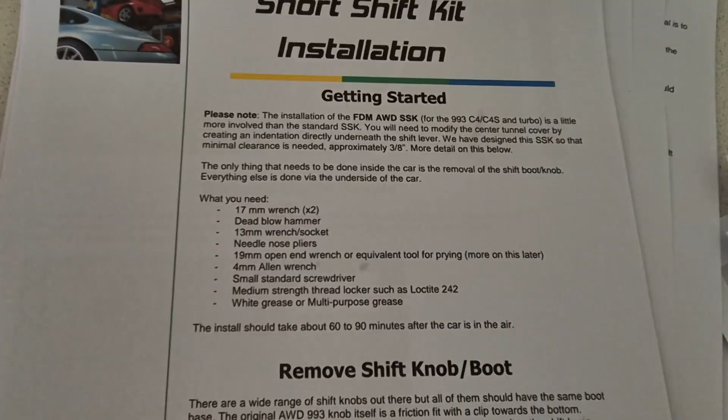There's a list of things I need to do. I need a 17mm wrench - hoping that's a socket wrench of some sort, because I don't have two of those, but I can buy some if needed. Dead blow hammer - not sure if this needs modifying now, I think it might have changed. We'll find out, but I've got a mallet somewhere, should be right.

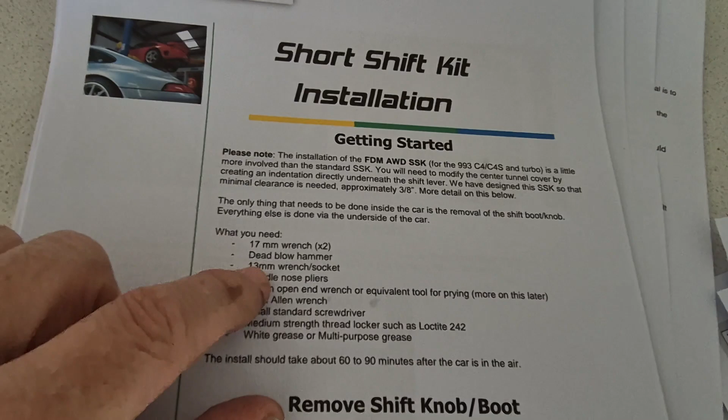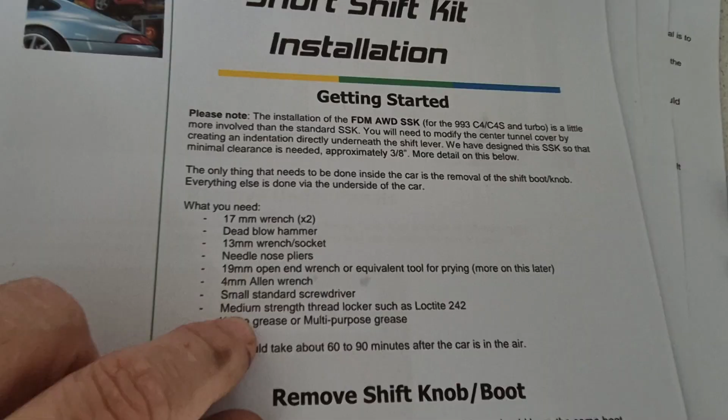13mm wrench socket, yeah got that. Needle nose pliers, got those. 19mm open end wrench, got one of them somewhere. Small standard screwdriver, definitely got that. Medium strength thread lock - I can only get 243, which apparently is the same thing but better with dirt and grease, so that should be okay. And white grease, I've got that.

Install should take about 60 to 90 minutes after the car is in the air. I'm tipping it's going to take me about 3 hours, just because I'm going to be slow.

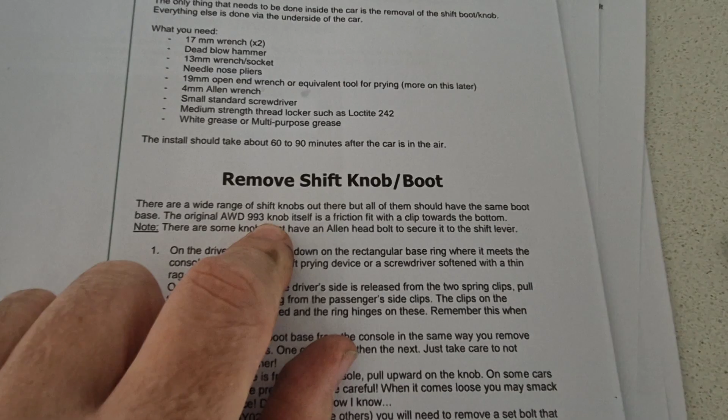So we're just going to rip through, following these instructions that you can download. I'm just going to make a video, so I'm not going to go through these step by step.

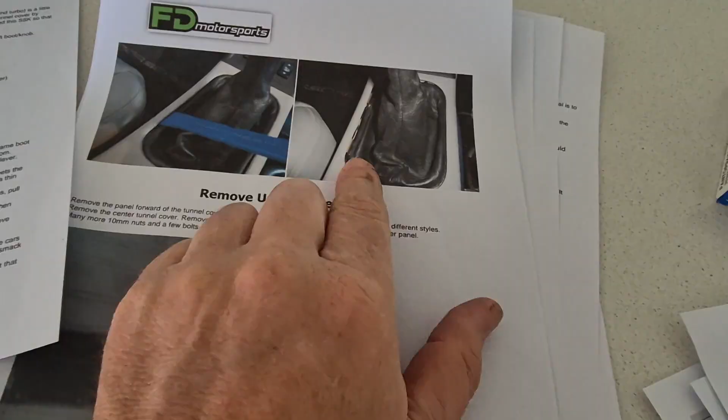Like removing the shift knob thing here - apparently you push down and just force it out. I've taken my console thing off before and found it quite difficult to get back in, so I might just take this center console bit out again. It's not a big job, and pry that off that way, but I'm not sure. Anyway, I'm just going to take a video of it and see how we go. Hopefully the car doesn't crush me.

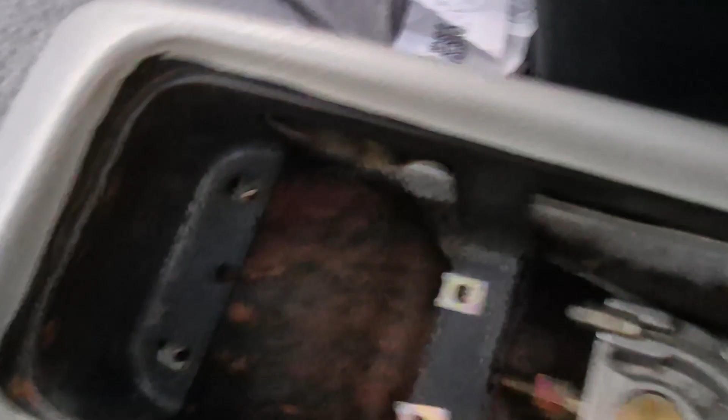Okay, so I've taken out my center console, undone it. There's a couple of screws back there - two screws for the cup holder, one screw under the handlebar here to remove this cuppy thing, and a couple more here, plus one under there for the black bit in the trim in the middle, and then a couple down here in the padding.

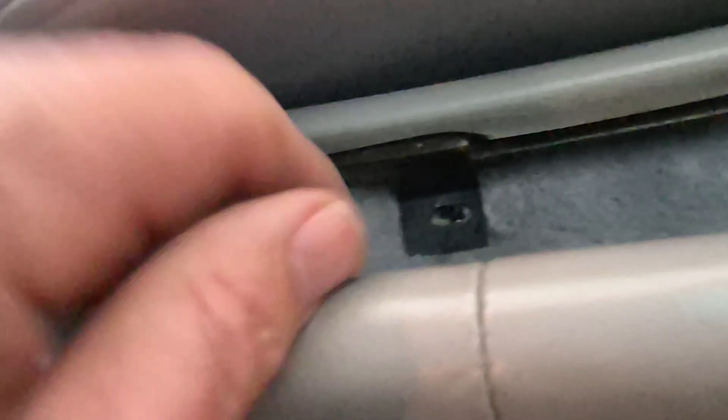Also noticed this cord coming out of the handle is really quite squished there. I don't have any issues with it, but maybe when putting it back, I might put something over the top of that just to stop it getting squished so much. Looks like that part of this holder squishes it on, so maybe I'll just scrape that back a bit so I don't cut the wire. Just noticed that.

And then in here I had to take this bit out, pulls out, and there's two screws in there, and that has loosened up my whole thing, so hopefully I can get this up high enough past the seatbelt buckles to get under here. I'll see if I can show you.

Alright, so I've got that sort of out, and I can get access under here to the clips.

Okay, so this clip - you can see one clip, and there are two clips you've got to pry off. I think you do that by pushing down on the top of it, technically what they say to do is push down on this bit here, this rim here, and it just pries out. But I think getting it out might be okay - putting it back in might be a different story. Don't know. Anyway, I'm just going in there and pulling it out myself.

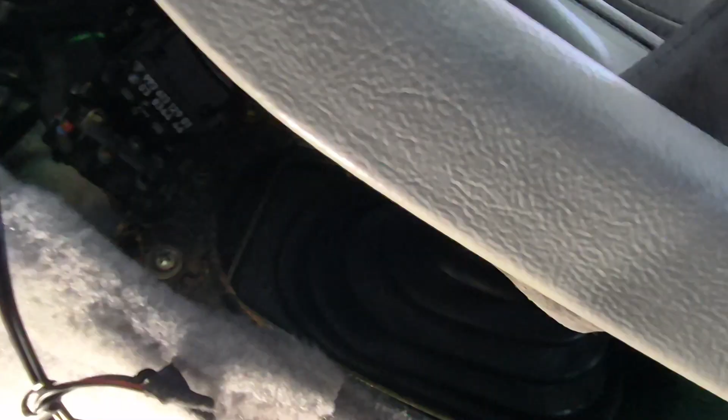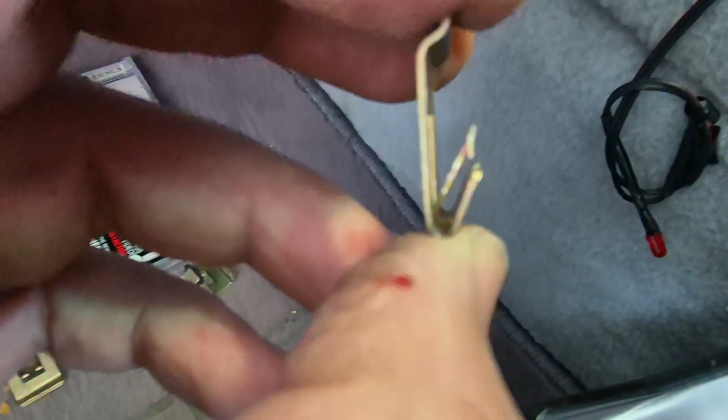So I now remember why I get it in the console and do it, because this is the clip. And if you look at this little jagged bit, hang on, it's a little jagged toothy bit. If you're pushing that straight down, it's sort of wedged over a bit of plastic, so I don't know how you can just push down on it and push it out. It really sort of clips in, unless this whole bit's meant to stay in and just the top bit comes out. I don't know. But anyway, I've taken them both out.

I've got a screwdriver in between these - sorry, the focus is so bad. I've got a screwdriver in between the pointy sharp bit there and the flat little bit next to it, and just pried it open, then pulled it down, and it sort of came out. It's a tricky job though, bit of swearing involved, but okay, yeah, popped down, so all loose and nothing connected.

I think it's meant to be sort of in - I think you're meant to push down here and pry that off, but because it sits in a groove on this side, the holder sits in a groove on that side and is clipped in on this side, for me anyway. Right hand drive, don't know if it's different, it shouldn't be different to any other car, but anyway, that's it. The bit's off. There goes my first 60 minutes.

Okay, so let's start with a little gentle prying.

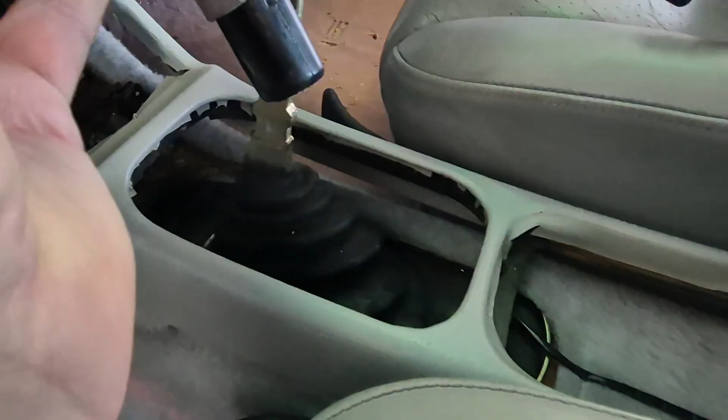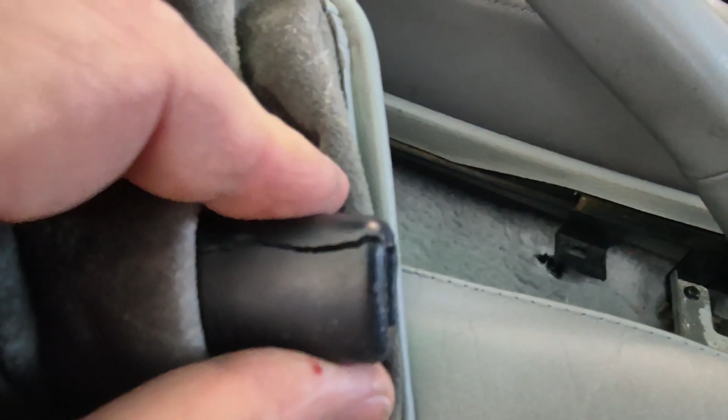Yeah, that was on there. A little bit of gentle prying, pulling, just gentle pressure or whatever. That came off. I've had this off before, and this is gutsed a bit at the front here. I've never repaired it because I couldn't see how it would then fit back on without being gutsed. So someone's had this off before me and sort of cracked the front of it, but it goes back on fine. Maybe the leather holds it together, and it doesn't seem to affect it too much, but technically that's not good. Anyway.

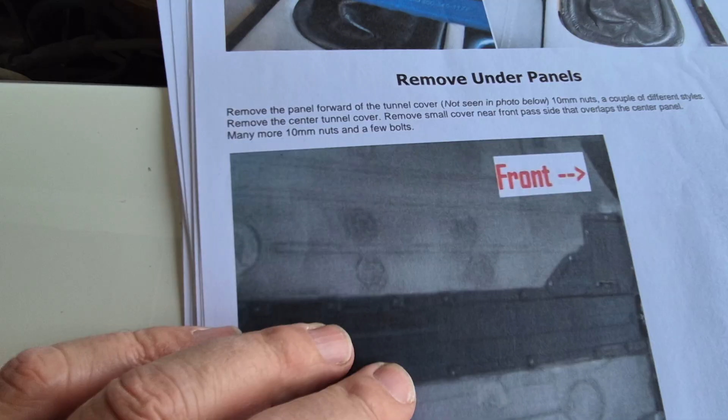Okay, stage 2, remove the under panel. So that's what I'm going to do. Just took off my front panel, and because my back floor panels are wedged in by my lift, there was an extra 8 or 10 nuts, but it was easy with a drill. Just whipped off the little side panel that's just up here.

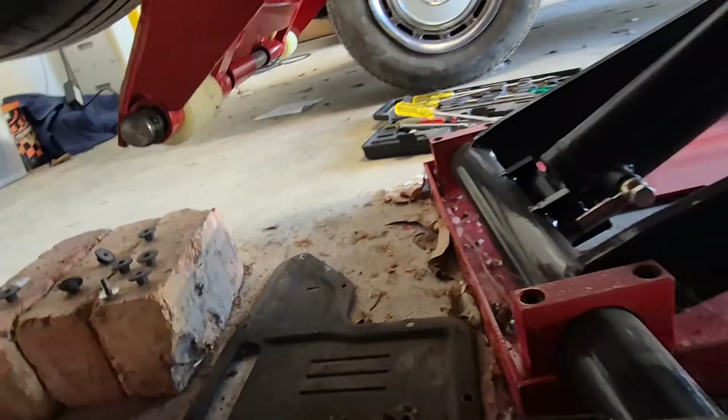Covers that, sorry, that's very close up. Took off my 10 things, pulled the thing out. It's all down there on the ground. You can see the front panel there. Center panel is just there next to it, and the little panel's over there holding some nuts and stuff on it. So now I've got access to the boot and all this stuff under here.

So let's go. Now what I've got to do is pull the rubber boot down, use a pickle fork, 19mm end, to separate the ball cup joint - slip the wrench in between the cup and the end of the forward fixed rod and the shift lever, between the red lines and below. Continuous pressure, prying down, we'll pop it off. Let's see - heard that story before.

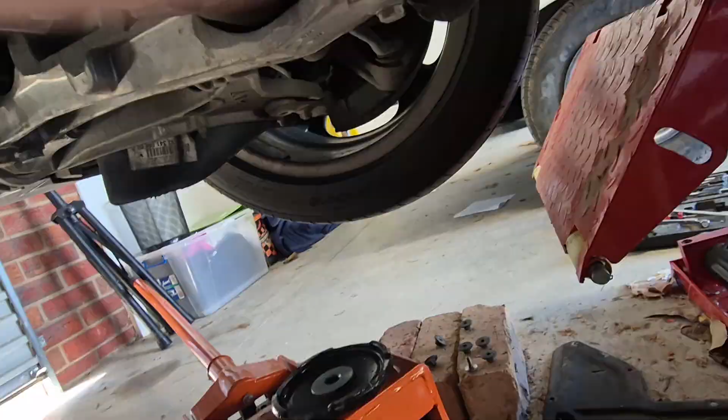I'd laugh if I went in here and already had a bloody short shift kit on it. That'd be funny. Well, that is... focusing on it, that is off. But I'd rewrite the instructions saying it just popped off - I'll tell you, it didn't just pop off. Took a little bit of love.

Okay, I've got to do the same thing at this end. Or I can just pull it down and it comes off apparently, but after the last effort I'm doubting that's going to happen. Let's see.

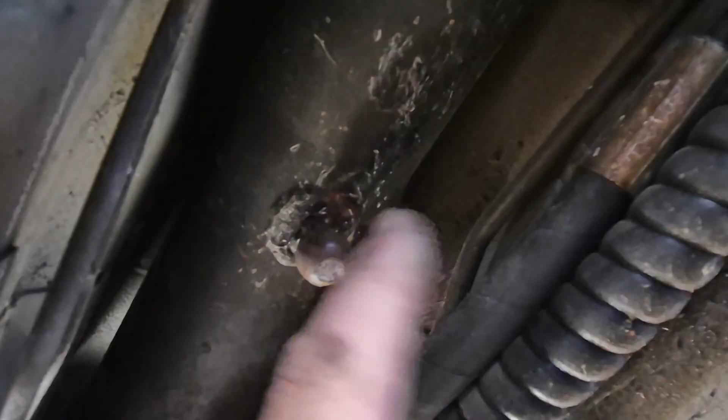That one's out as well, the front one. It took me a little while, but I think I was just being careful because I've never done it before. I didn't want to snap anything off, but in the end I just pulled it down and it pried off almost on its own. I didn't want to bend that, but there's no way you're bending that, I don't think. Anyway, it's off. Booty's off. Let's go to the next stage.

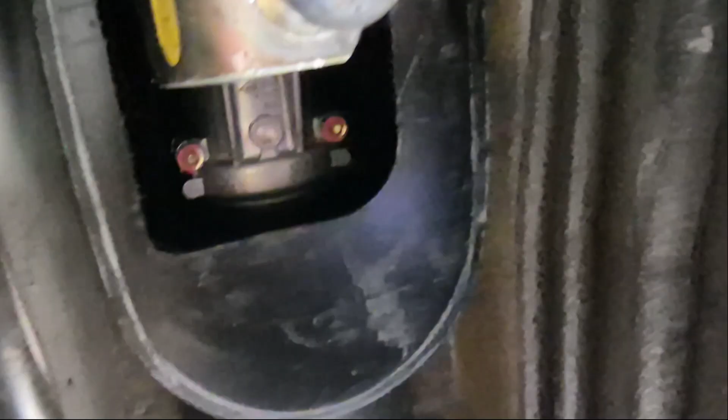Okay, up underneath there are 4 red Allen things, you can see them there, and there's a little spring clip somewhere - I think just there. I've got to take off just at the end of that rod. Doesn't matter which order you do it in apparently, so I'm going to do the bolts first, then the little E-clip. Hang on, the E-clip's just there, I might just do that first. Take that off - whatever, E-clip, I don't know what they're called. Clip on the end of that.

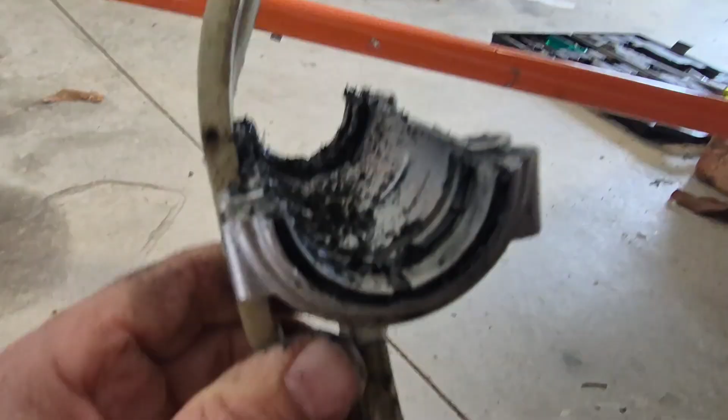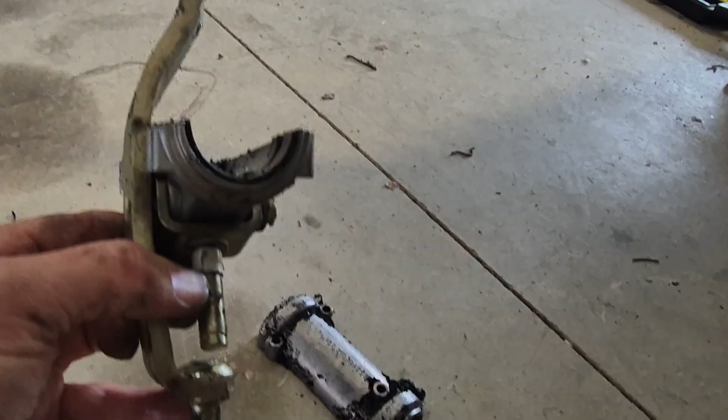Okay, so I've got the 2 halves out. The instructions - I can't remember exactly what they say - but it's like loosen the four Allen bolts, let the bottom half drop down, rotate the top half and let it all drop out, which basically makes sense at the time when you're doing it. This bit's sort of half stuck, and because you've never done it before, the top half's up there, but what's spinning around, don't really know. But in the end, you literally - I've only got 2 hands, obviously - so hang on, let me just do a couple of things here.

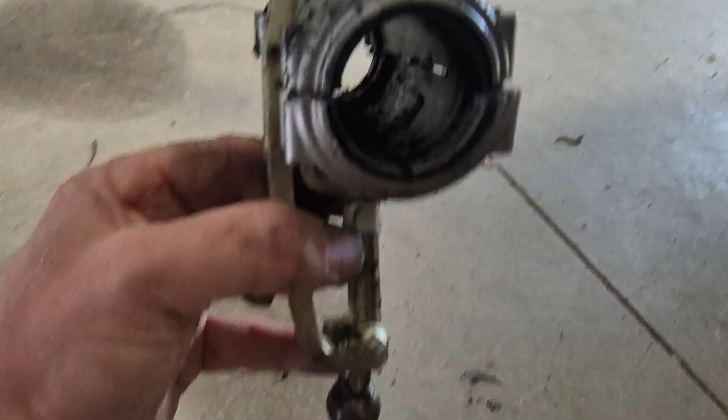Yeah, if it's like that, it stops you pulling the bottom half straight out because that bend in the shifter hits the top casing. So you're basically rotating the casing like that or similar, and then you can pull the bottom shaft down and out, and then it all just sort of comes out. So anyway, it's out. That one's a little bit not straightforward, but once you've done it once, it'll be easy as.

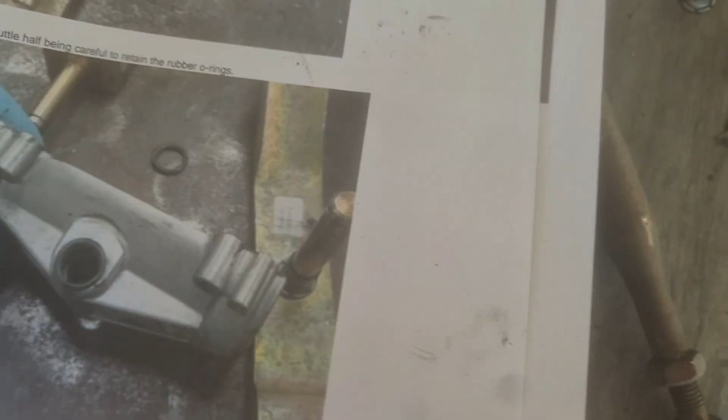Okay, so I took off the spring washer things, whatever that clip is, and pulled it apart, gave it a clean. My O-rings stayed inside the unit, so I've left them there, haven't touched them. Gave it a bit of a wipe out because it had a lot of crap in there, probably from underneath the shifter boot when jiggling it trying to get it all out. Not sure I was supposed to wipe it out, but I'll add more grease to it as instructed.

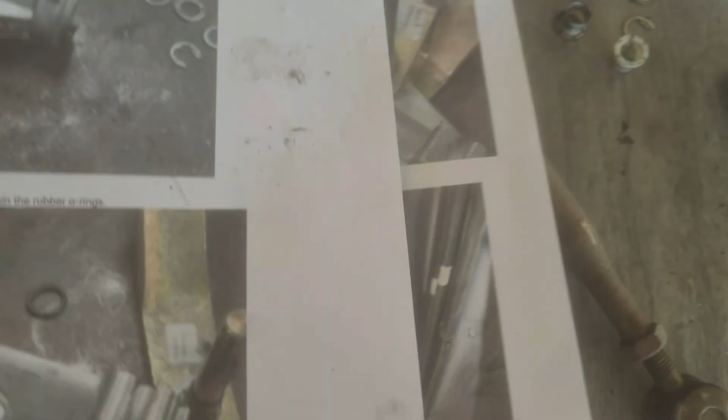So here are the bits I've taken apart. Sorry, it's a bit all over the shop, so I've given this a clean up. There's still something gritty in it, not sure what, so I don't know whether to give that a wash or not. I'm very much don't touch what's not broken. I'm going to make sure these guides are clean and we'll re-grease them up.

These bits came out of one of these, out of this part anyway, came out of like here. I thought, oh, they're broken, this one's cracked, but it should be right. The other one I took out was exactly the same, so I'm assuming they're meant to be sort of half cracked. Got my thingos.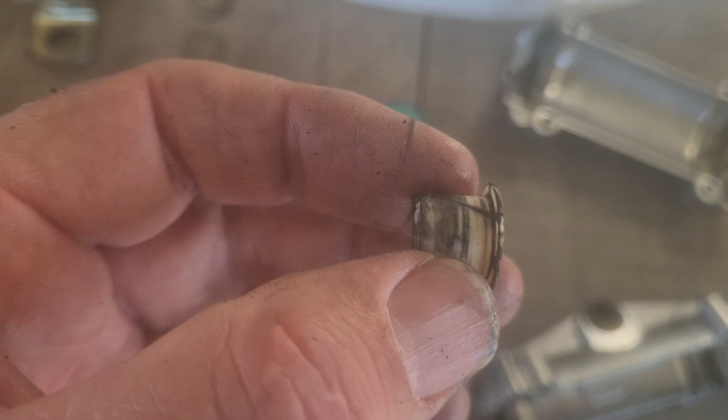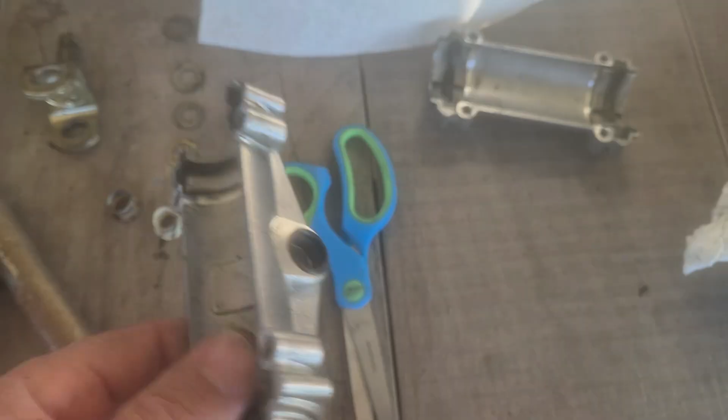So really, following the instructions, I basically just slide in the new shifter bit, which is in here, and reattach all the clips, reattach the part, and oh, that one's got a crack, the split in it as well. Interesting. I'll give that a clean up too, and then just put it all back together.

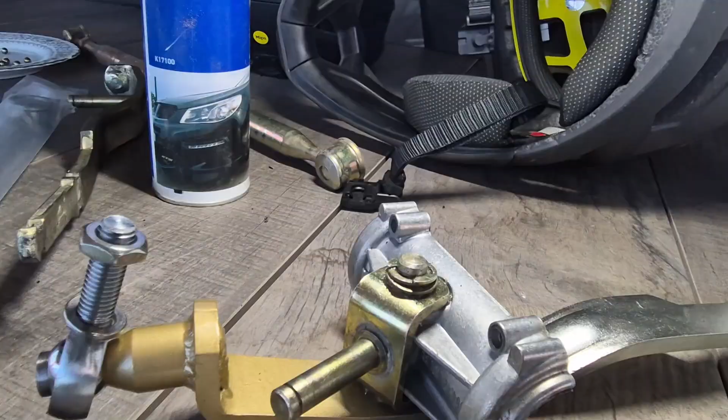Okay, so it's back together. The reason I'm not going into detail about taking it apart is it's pretty straightforward. Just make sure that clips in properly.

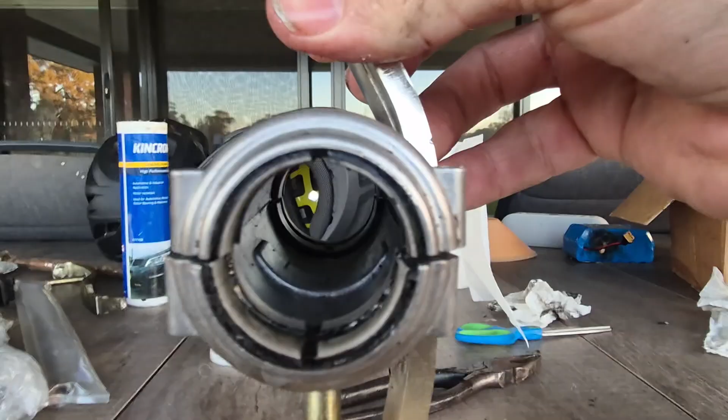That's it together. So you're going to have to just look at this, see this with my thumb, and I can't remember how to zoom out of that. My thumb is well over this casing just here, so you can't have the casing sitting like that because you can't feed it up. You've got to basically have the casing off.

I'm assuming sort of to the side, so you put that in first and have it sort of sitting to the side. You would then slide this lever up into position, and then when it's into position - I can't hold the phone at the same time, sorry - you would then roll it back over and then do it up.

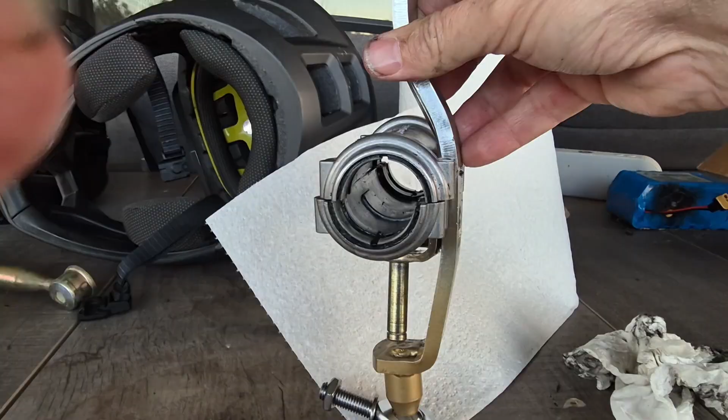Which is what the instructions actually say, but that's the opposite of taking it out. That could be a little bit clearer, but anyway, I worked it out. Anyone else can work it out too.

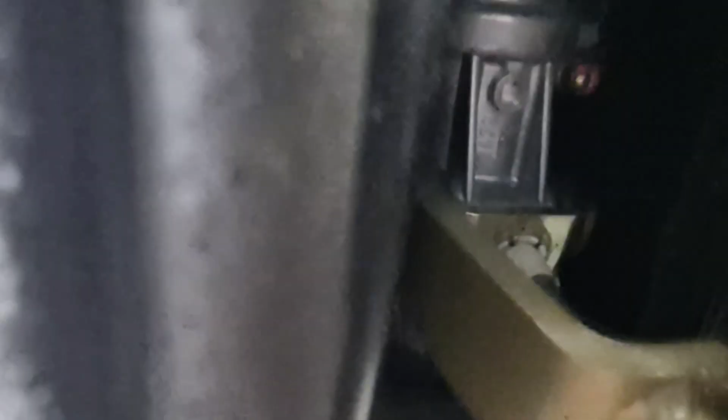Okay, so they're back in, but I'd almost rather kick myself in the balls and do that again. That was just annoying, but it was true. Once you got one of them in, though, the rest went really easy.

So I haven't put Loctite on them yet. I'm going to take them out one at a time, then put the Loctite on them and put them back in, but that's where we're at so far. Got that little white plastic washer greased up as well, if you can see that just there, back in there. And we'll get onto the gold rod next and see what happens.

Okay, I'm just wondering if I can do this without taking this whole back plate off. Sorry, bad picture, I'm zoomed in, but yeah, there's the covering, plastic covering.

So I was wondering if I can get to this boot. That's the nut I got to take off, so I'm going to do that. Oh, there it is there, and slide that out.

Here, which I'll come to take off, and I've got access to this nut, so I don't think I have to take it off. Though I might want to take it off because I want to have a look at the transmission mount in there later and see if that's buggered up.

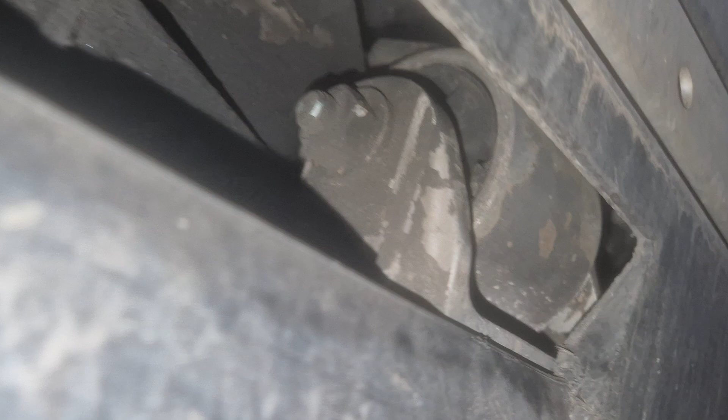Looks okay, but sorry, very out of focus. It looks okay, but I just don't know. The problem is it's all wedged under my lifter to get all the screws out, so I can't do it in one lift. Anyway, I'm going to take this off and get this old rod out.

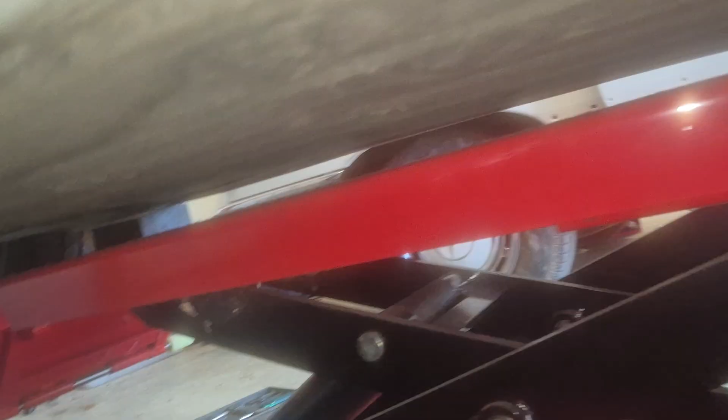So I undo that screw and drag it back towards the front of the car. Okay, that's come out, it's a nut and a washer from the little hole there. Let's see if this thing just shifts out.

So that's not like gears changed. I think they just sort of changed gear. I don't think it actually... I'm going to need two hands to give this a pull, so I'm just going to do that.

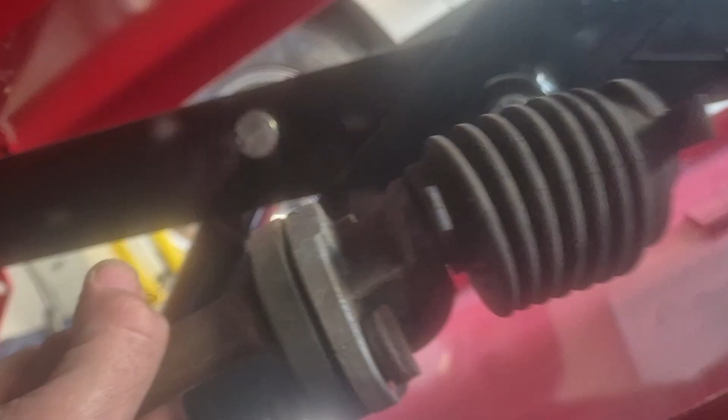Okay, that has come out. That took a fair pull to drag out. So yeah, double hands, good firm pressure, and it yanked out.

So it looks a bit loose. Let's have a look how poor it is. Okay, that's out. Don't forget, don't lose this little grommet in there, you're going to need that little plastic bit.

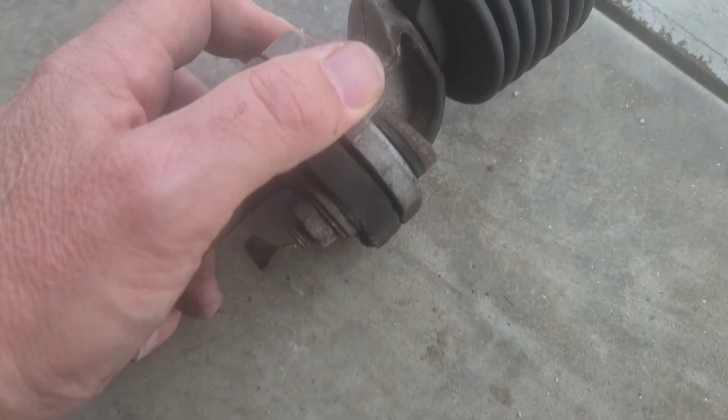And this, you can really see - I don't know if that's meant to be tight or not, but I presume with a bit of shifting it was a bit, I don't know if it's meant to do that, but I don't think it is. So that's a fair bit of wobble in that.

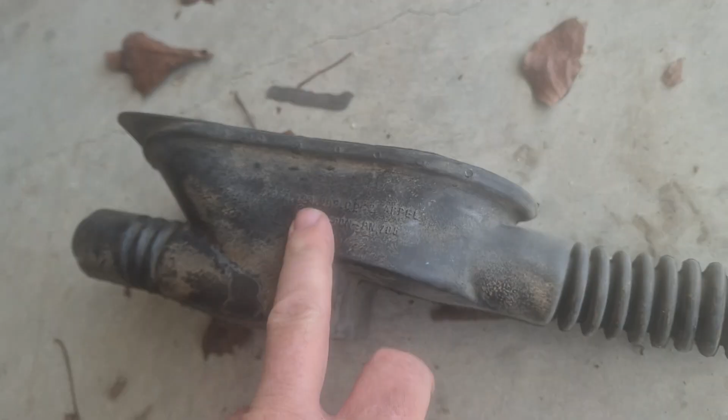So hopefully it'll tighten up the shifting a little bit. Who knows? Anyway, I'll give that a clean up. Let's get this rubber boot off it, clean up while I'm at it, and we'll get the new one back in.

Okay, I have cleaned up the rubber boot and put it on the rod. I didn't actually check which way this came on or off when I did it, which I should have, because it's not actually symmetrical. But going in, I've deduced that the bigger hole is at the gearbox end and the smaller hole is at the shifter end.

And it's sitting the wrong way around. If it sits the right way up, so if I turn it the way up it's going to go into the car, which is that way, which I've greased up the top bit. Oh, you can't see it. Greased up the top bit, I've got a white bit on the bottom. The other white washer is already on the car.

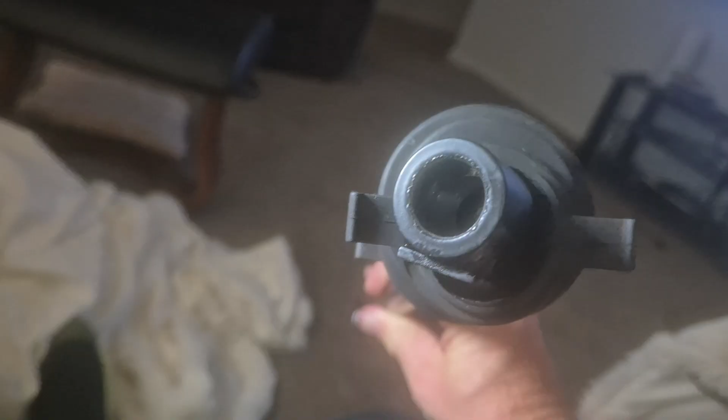It's the higher point - the rubber boot isn't down the middle, so the higher edge I'm putting to the top of the car and the thinner edge at the bottom. So that's how I'm going to try to put it in anyway.

Okay, I've got the boot back in there and the nut on. I haven't actually got Loctite on it yet. I'm going to get it all put back together first before I do that. So now it's got the rod to put in at this end, just there, so I'll lift it up and chuck it in.

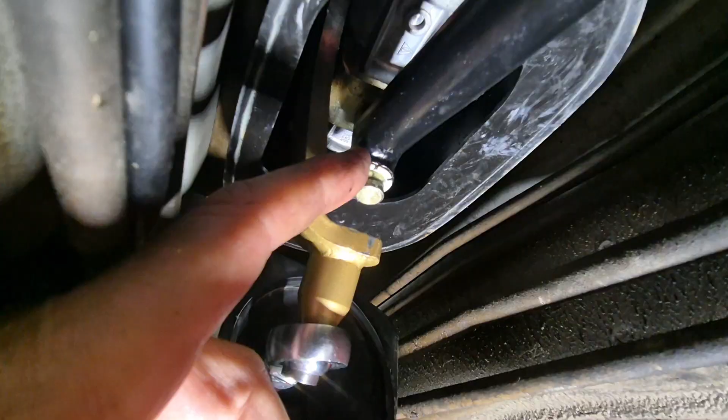I took the nut off at the other end again, the fixing nut at the gearbox end, because I found the angle too hard to get this in properly with the plastic clip. So I loosened it, or took it out, left the shaft on, the golden rod or whatever on the gearbox end.

Then I fitted this on because I had a bit of play, a bit of pressure, didn't hit it, just used a fair bit of pressure just to get the angle right, a bit of grease. And then I've rebolted it back at the other end. I'll put the washers and the clip back on here.

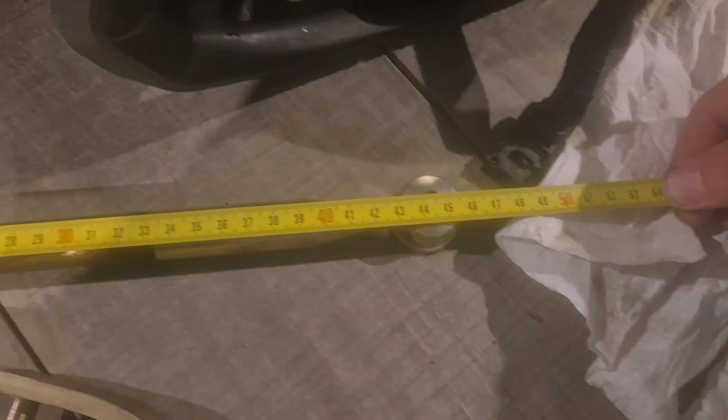Okay, measuring the original one from center point to center point, 44.5 centimeters. Okay, well, I've got my shaft here.

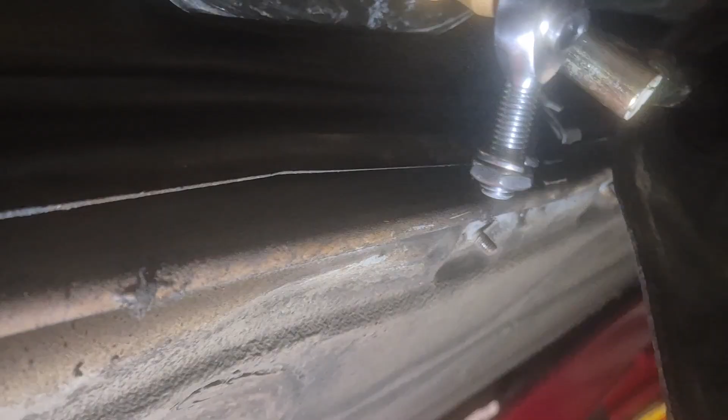I'm gonna connect this part onto that bit hanging down halfway, as it says in the manual. That gets you some room to adjust forward and back. Then I'll see where the front end lines up with this, and see how we go. I'll try.

So that's what it's looking like at the minute. I've sort of lined it up with the ball. I've gone up the top and it sort of sits in a good spot.

I'm not sure why they don't reverse thread one of these, then you could just twist this pipe and it would self-adjust and lock it with the nuts at the end. I guess a risk if the nuts come loose it could move, but I think they're threaded the same way. So if you spin this bolt, the long tube, this one would extend and that one would retract and vice versa, so it wouldn't really serve any purpose. But if it was reverse threaded one of them, you could spin it and both would increase and decrease, and you could just adjust it. So that would be a good idea.

But anyway, it seems to be in the right spot. So I'm going to now tape this onto the ball, and then go and see what the shifter feels like. If it feels okay in the right spot, then I'll leave it at that, because I don't really want to push this on and have to pry it off again, because that'll probably just wreck the bit in it. So yeah, let me just tape it up.

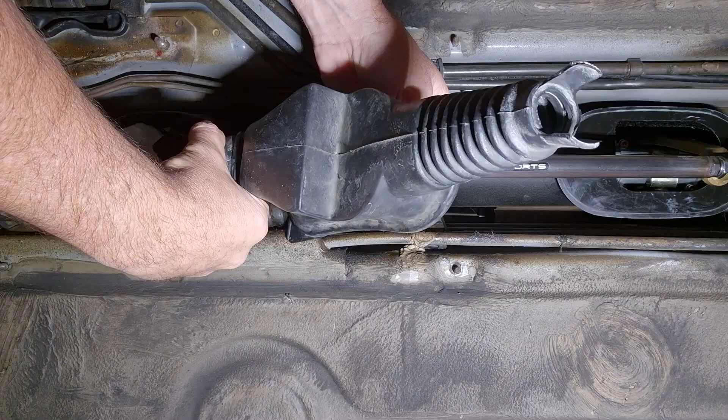Actually, because I've got that sort of marked at a spot, have I? Yeah, I should be able to.

I will then tape up that end. I'll have to remeasure it because I moved it to get this back on, but I'm going to go for 44.5 centimeters and see what it's like, and then see how it feels.

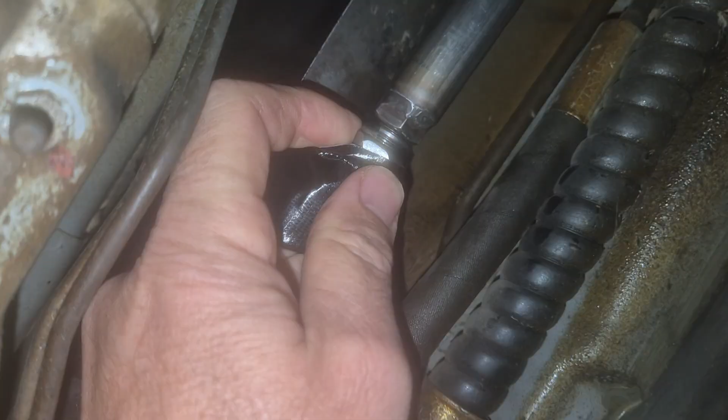Right, so I finally worked out where the 17mm wrenches are, and that's to hold these two nuts - well, the rod and the nut - to tighten that up, and the same just in there. I can't pull it back with this, just tighten both ends. Also, it's important that the plane - so if that is sitting like flat, like a cup or whatever - make sure this end is flat, and that is flat as well. So just make sure they're in the same plane, so one's not at like a 45-degree angle to the other. Just make sure that's flat and that's flat when you tighten them up.

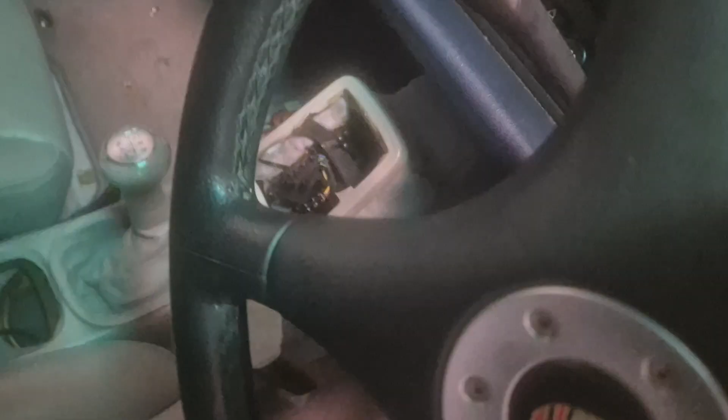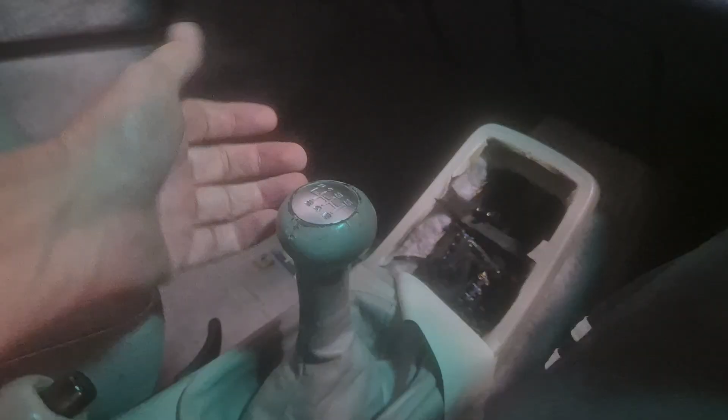Okay, so it's sort of taped into spot. Seems to look all right. I'm just gonna see what it feels like, because I think you sort of want to get this right the first time. Not sure if it's too vertical or not for me, but it seems okay. Don't know the angle on this side - if I get a look at it, I know it's about feel.

Okay, so I've got my movement going now, which is basically that. I'm thinking maybe sitting it a little bit more vertical - I'm not sure, I'm just trying to think, because that's quite short. That pulls down, I can't even remember what the other one was like now. So that feels pretty comfortable. I've measured it the same, but I have a feeling I might just want a tiny bit more forward, just for that throw down there. It seems okay, don't want that any more forward. That seems pretty fine actually.

Another thing, when I was testing, I still haven't tightened it all the way up, but the nut at the gearbox end - I just had it finger tight to test it, and it was quite wobbly, really quite wobbly. I was a bit worried, but then I thought, I went back and all I could see, the only thing that would make it wobble would be the nut down the other end, which it was. And now when it's in gear, it wobbles, but it's not wobbly - it's quite firm actually.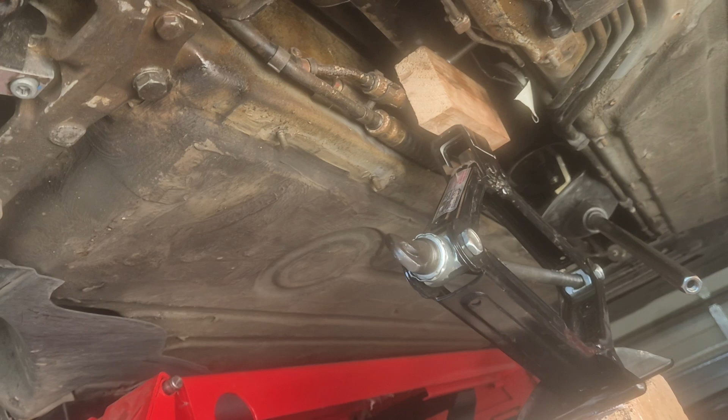It's good. So don't judge me for the setup, but that's what I did to get the cup on. I could not get it on. I was lifting the car up from the front. I hope I haven't rooted stuff - it just wasn't going on.

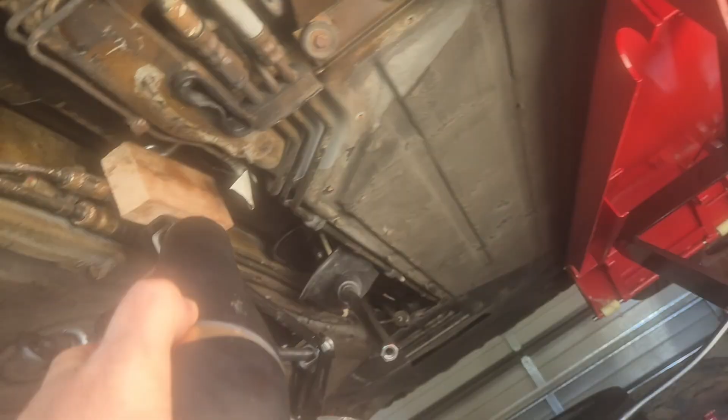It is about 10 degrees Celsius outside, or in here probably - could have been 14 or something. So in the end, I put it up like this, raised the car, took the weight off a little bit, and then a hairdryer, which is right here - banged that on it, just held it there. It was going to give up and I was going to take it down, and then it just slipped on. So can I suggest that and a bit of a hairdryer on it, and it went on sweet as.

So anyway, sorry about that - sorry I'm at a bit of an angle because I'm lying down. That's it, it's finally on there.

Now normally you'd have the rod connected, I'm assuming, but I had to take the rod off so I could get it absolutely flat, because I could not get it on otherwise - it's on a bit of an angle. I'm not sure, but I think there'd be enough thread either way.

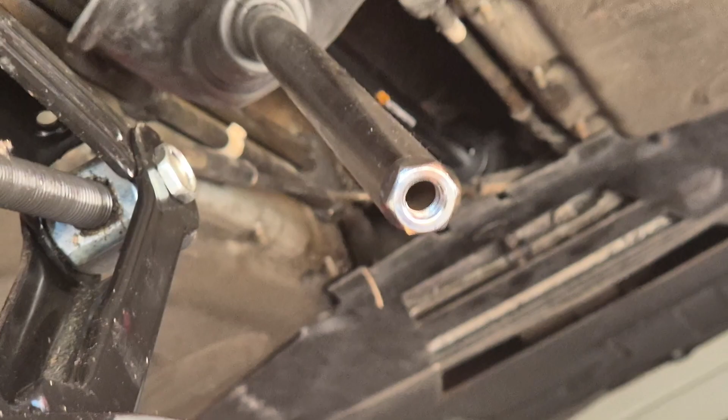Once again, I'll say it, if one of those threads - either there or down at the other end of it, all the way down that end - was reverse threaded, you could literally just change the length of the rod by twisting it. So anyway, let's see how we go. If I can get it screwed on all the way at one end, and then screw it all the way on at the other - I think this end's even longer, I don't know, whichever's longer. If there's one longer than the other, I'll screw it all the way on, and then off the other end, and try to get it the right length. Anyway, a bit of playing - I think I'll be able to get it the length I want, even though it's disconnected. So anyway, see how we go.

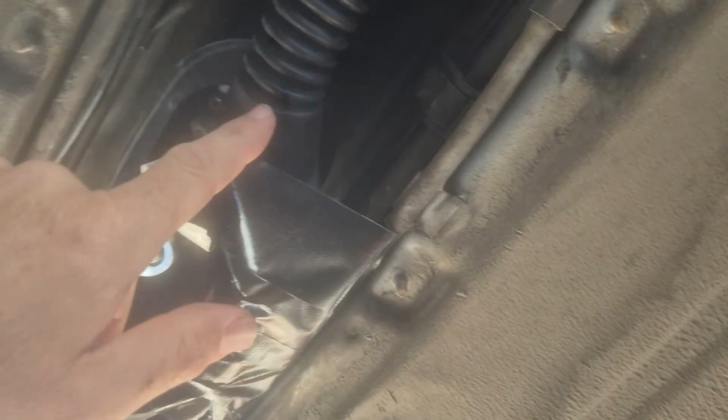I just taped the boot out of the way, so this can have access to scratching the metal a bit, just for me to test it.

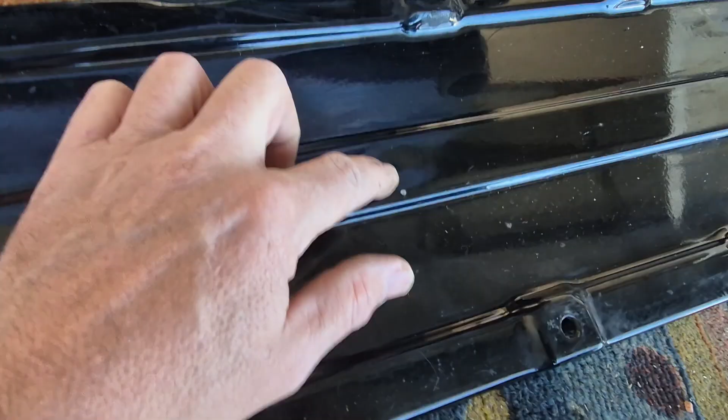Okay, so it's come up with a little scratch just there, right near the ridge, and you can't really see, but there's a scuff mark across the middle there. So there's already a very slight indentation, you can sort of see it there already. That was there before, so whether someone else gave it a little tap or whether it normally comes like that.

I'm just going to try to knock about 1 centimetre wide across here. I know this bend here reinforces it, so I'm trying not to bend it, I don't want to wreck it, but I'm just going to use the flat end of this - it's like a $10 bloody thing, I'll never use it anyway - just to get a bit more of a direct run across there. But anyway, see how we go. I hope I don't fuck this up.

Okay, so now you can tell I've sort of flattened it out a bit acrossways. I really wanted to get this bit right near the lip here down, because that's where it actually took some paint off. The rest just scuffed it slightly, but here it took a bit of paint off. So what I might do - I don't think I've warped the rest of it, so I'll give that a little respray with black paint and let it dry out, and then do the same thing again and see if I've still got scuff marks. I'll just tap a little bit more around here to get it a bit wider, but that's about it. We'll see how we go.

So I've repainted it up, so I'll get it back up there and see if it re-scratches once that dries.

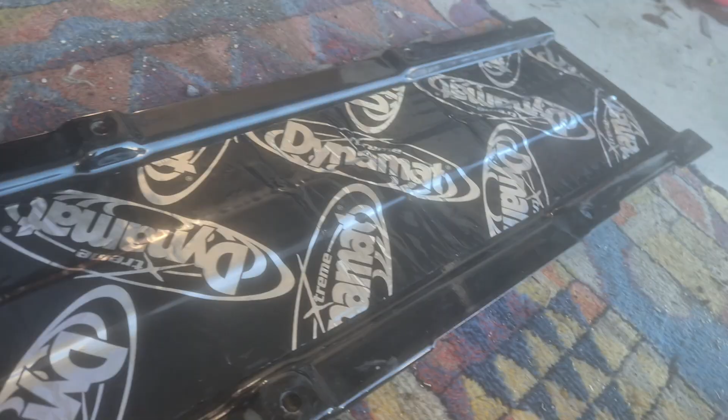Okay, picture's not great, but final test run. First of all, when I was driving it, I gave it a little test without this panel on at all. Obviously, a lot of road noise was coming up through the gear shift lever area inside the car. So really, there's only the rubber boot underneath that probably wasn't connected properly. Then there's a rubber boot on top, under your gear lever cover, under the original leather gear lever cover. There's a rubber boot, and then you've got your leather boot bit above it. So you've got boot underneath, boot on top, and a leather one on top of that, and there's a lot of road noise. So I put a Dynamat thing on here just to help reduce that, maybe, don't know.

Anyway, from what I can tell, no scratches in it. It's a bit gutted, I've got a bit of a lumpy thing there, but I think that's just the way it's got to be.

This thing, you can't even - it's rock solid. Can't even hardly move that at all with your finger, it's very, very stiff. All the gear changes are heaps better. I can't even see the throw, but that's the throw on it. Second gear, a lot better. It does make a big difference.

I had a rattle in the gear stick, so I pulled it off. I always thought it might have been the shifter or the linkages or something, but I've just done the short shift kit, and I know everything down there is pretty solid. So I realised it's just this banger.

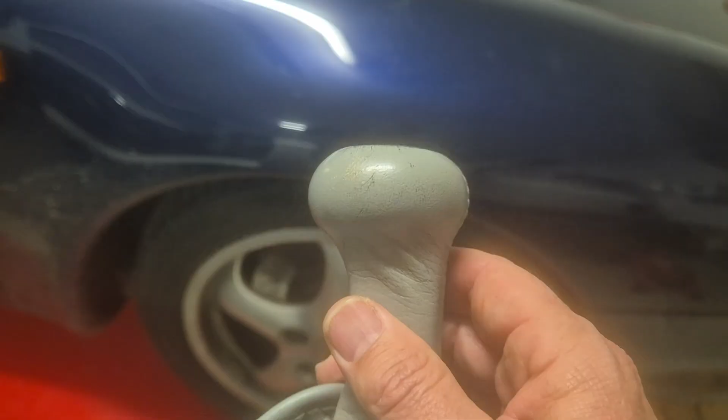If I listen, I don't know if you can hear this or not - bit of a rattle and a shake.

So I've taken a look at it, and I think you're meant to pry them up, or someone's been in here before and fucked it on me.

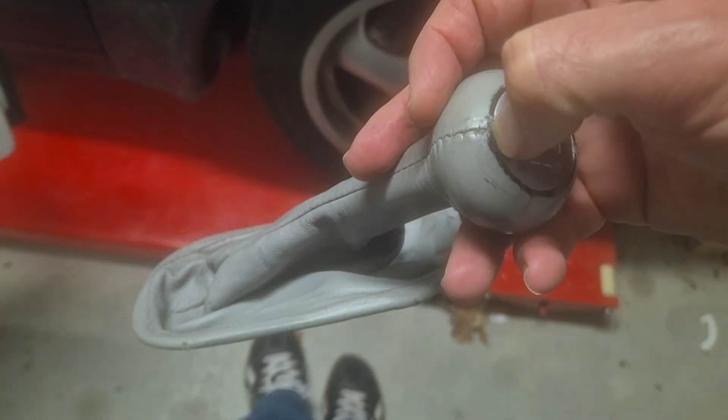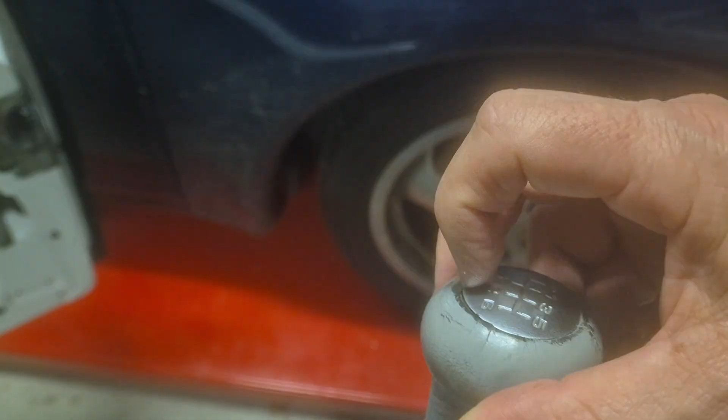So basically, under the numbers here, I read you're meant to get a little screwdriver, but I've done mine. If I just pull it up around here, very gently, one-handed. You wouldn't be able to do this one-handed, I think, if it wasn't rooted. So I'm just going to pull that out.

The quality of my videos is second to none.

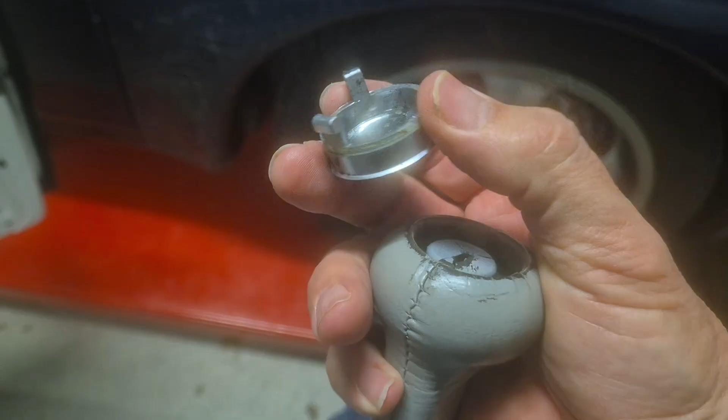And as you can see, one of these clips is broken. And this has deteriorated a bit inside, so I think this plastic bit's just been just enough at the right frequency to rattle left and right.

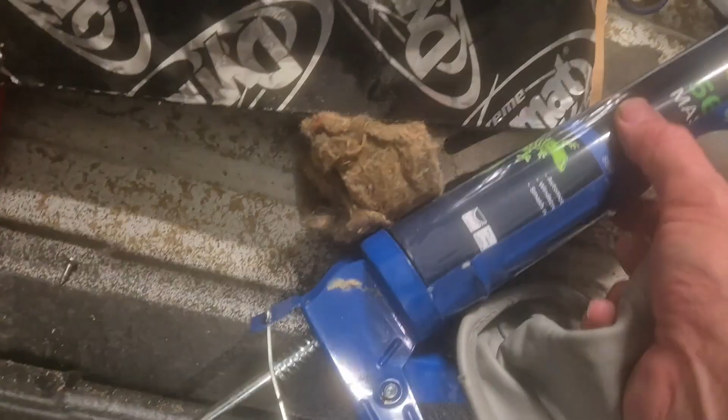So my plan is to chuck some mastic stuff in it just to stop it rotating around, and we'll rattle it around and see if that solidifies it up. Could be the worst thing in history to do to it, but that's what I'm going to do. Well, I'll just do that and see how it sits in.

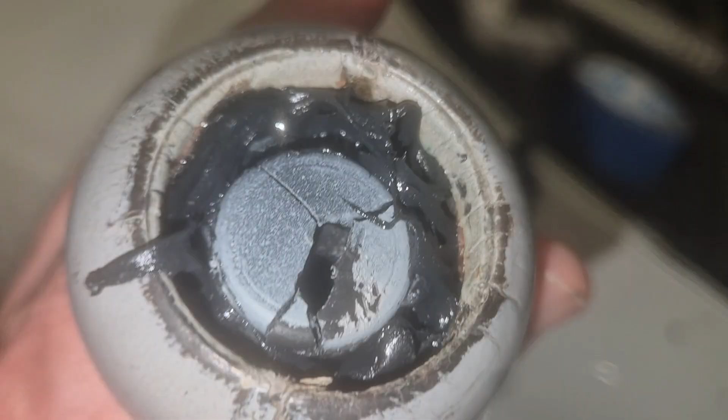Okay, so I'll put some inside the middle, put some around the cap, and that should be enough to stop it, I reckon. Not sure if it will or won't, but otherwise I'll just pry it out again. I think this stuff sort of doesn't set rock hard, it's just sort of like window sealing stuff.

As that TikTok says, who's gonna know?

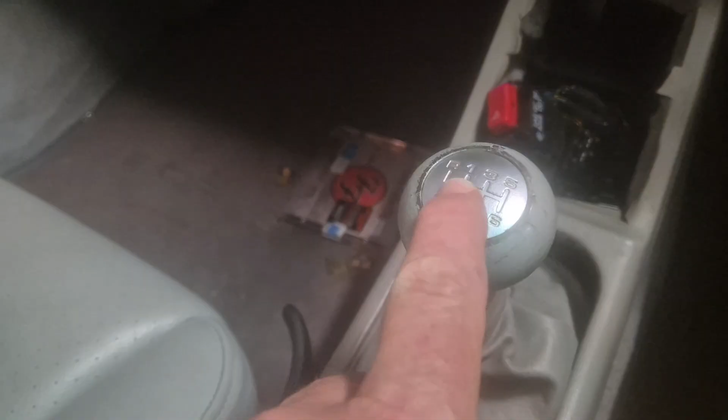I think that'll be fine, I think that's not a bad solution. I could have glued it in, but the glue could dry out and rattle. I don't know what mastic will do, but hopefully it stays a little bit. I mean, it was press fit anyway, it wasn't going to come out, so I think that could be a good result.